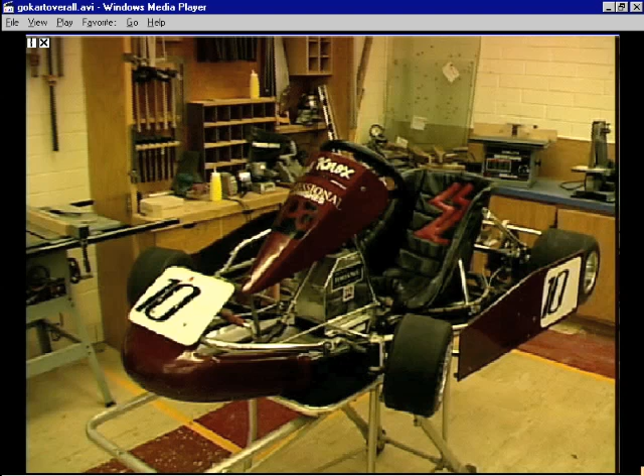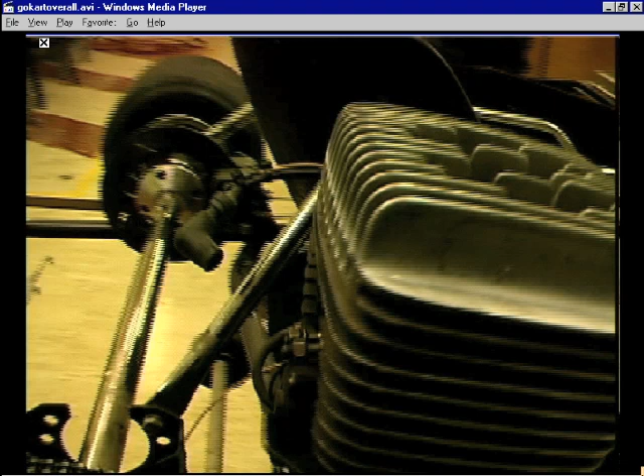We're going to show you in the next 5 minutes how we build a go-kart. Specifically, we're going to build one part completely from the start to the finish so that you can see how it's done. The part we're going to work on today is called the engine head. And that's what you see right here being taken off the engine. That's the engine head, and that's what we're going to make today.

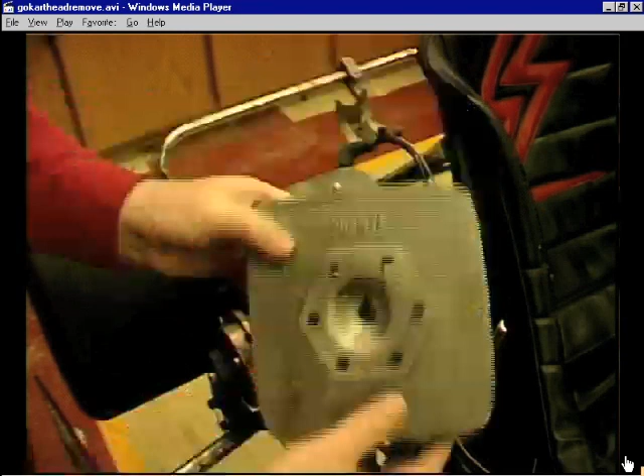We're going to use some very powerful tools to take this existing part that you see and create a model of that part inside the computer. Here you will see us take a three-dimensional digitizer, take dimensions off the existing part, and create a model of that part inside the computer.

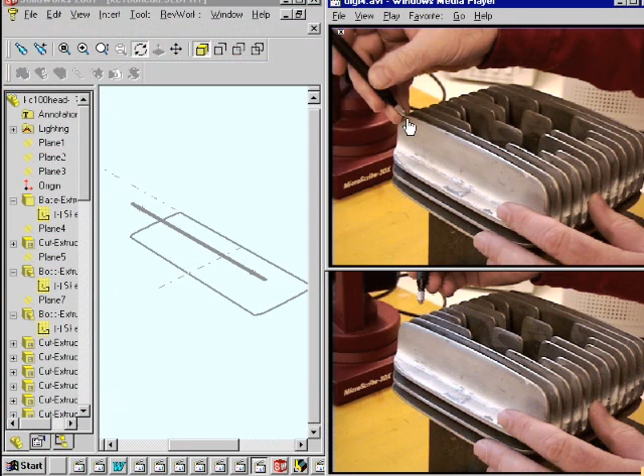This is a digital model. It's the same as the actual physical model, yet it allows us to do some very unique things with it that you'll see here in the next few minutes. We're going to take some more dimensions here, and we're going to create the rest of the head, as you will see here in just a minute. We're working on the upper fin assembly right now. You're going to see this turn into a solids model.

There it is. Now you see we have what we call the vertical fins part and the horizontal fins part. We've made the horizontal fins red and the vertical fins of our engine head in dark blue. Now we're going to put those together, and as you can see here we have a half of a head. Now the reason why we only have a half of a head is because we let the machine create the other half, which saves us a lot of time.

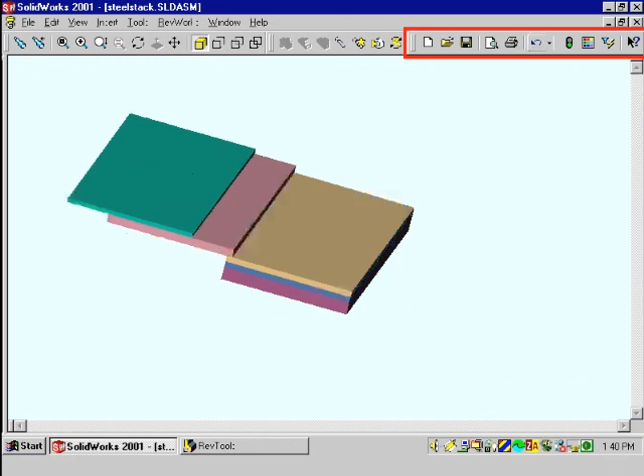Here you see a stack of what we call digital steel plates. They're not real steel plates, they're a digital model of steel plates. Now we can do a very unique thing now that we have this inside the computer. We can take and place our model of our engine head right inside of those steel plates, just like this. You can see that those plates are totally consumed

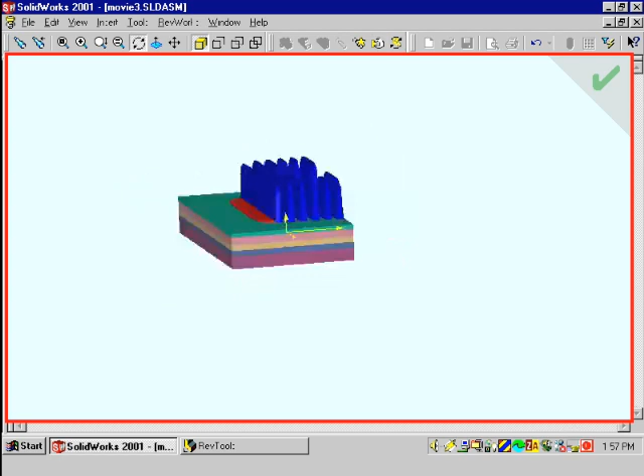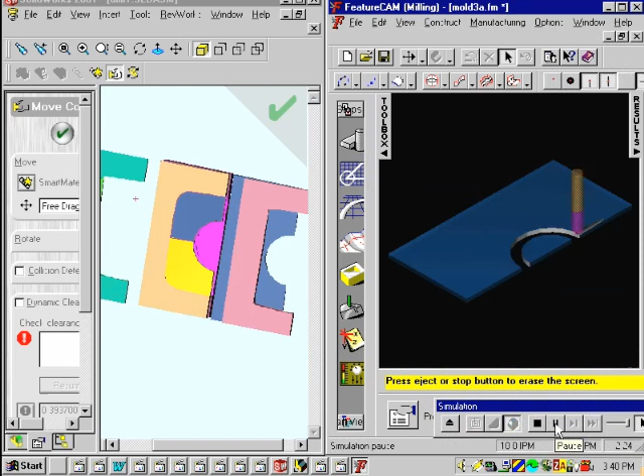by our model. Now, as we pull our model out, we have left an impression on the steel plates, as you can see here. And this is exactly what we're looking for, because we need to build a mold in order to make our engine head, and so we have just gotten the pattern for that mold by doing what you just saw.

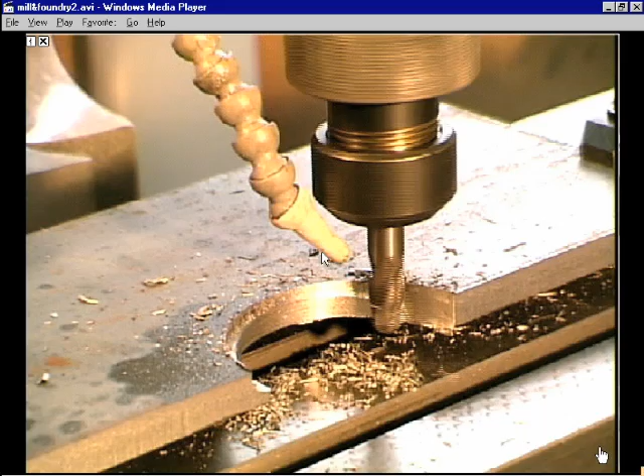Now we're going to take one of those plates, the one you see here in blue and yellow, and we're going to let the computer, using the surfaces that were created in our previous little model workup, create the information necessary to drive a computer-controlled milling machine to actually make that mold in steel. Here we are, cutting that very same part that you saw us simulate the cut of just a moment ago. Here's an end view of the milling machine.

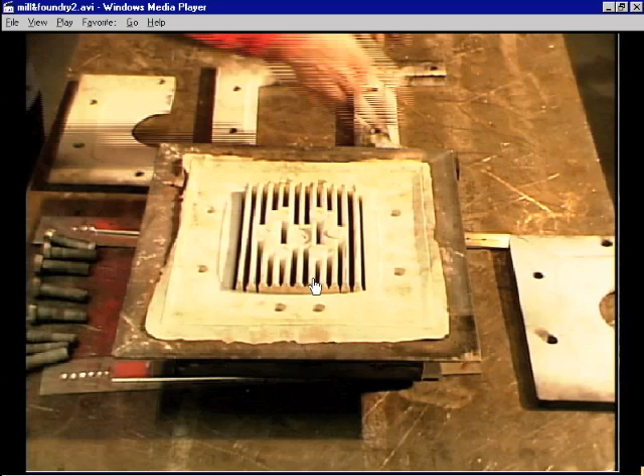The mill goes in and takes big, fast, rough cuts, and then comes in and takes fine cuts, leaving a little tiny ridge that's only 1/1000th of an inch thick, so that we can sand that ridge down and make a mirror polish. Now you can see we have our upper fin molding application in place, and these are our steel parts for our lower fin molding apparatus. The white that you see here is mold release, which allows the part that we pour into it to come free of the mold easily.

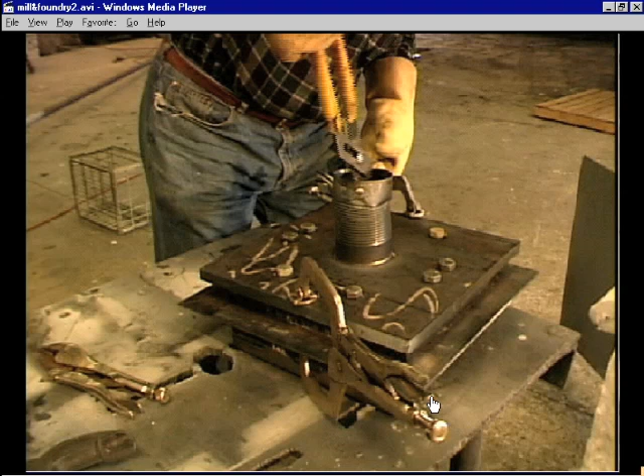Here we have our mold all assembled together, putting the bolts in so that it won't slip and slide around. We put a funnel on top. We come over and get our molten aluminum, that's liquid aluminum, and we pour it in our funnel, spill a little bit, and then we wait a few seconds, and we pull our pins off and take our mold apart and see what we've got. Looks like we have a solid engine head.

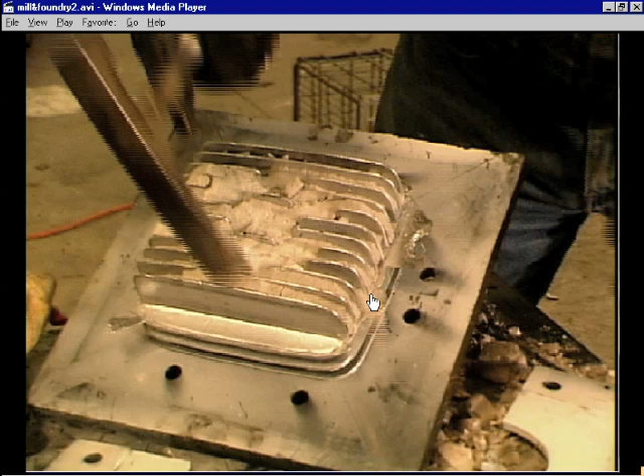Now you can see us pulling these plates off. We're just about ready to pull off that one that you saw us mill in the milling machine. Makes that deep fin in the side there. It slides right off, so our mold release did work. Now all we need to do is cut our funnel off the back side, and we'll have our part. Let's flip it over and see. There it is. Let's go through and clean it up. Now we have it all cleaned up.

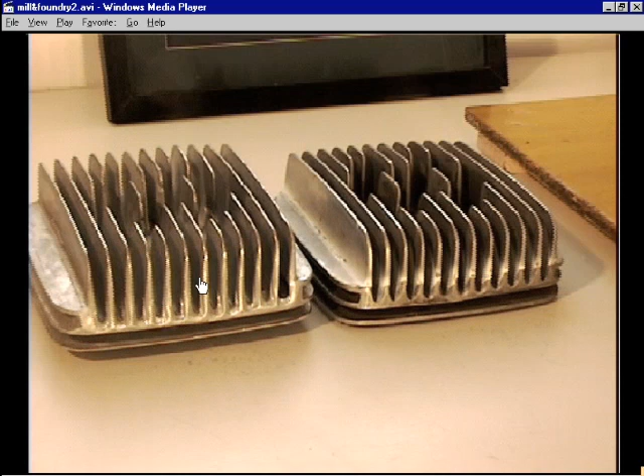You can see that it is an exact copy of the one that we took our original digital model off of. It's a little bit higher because we need to do a little bit of milling yet on this part. You'll see it right here. This is the one that we just made. This is the one that we made our mold from.

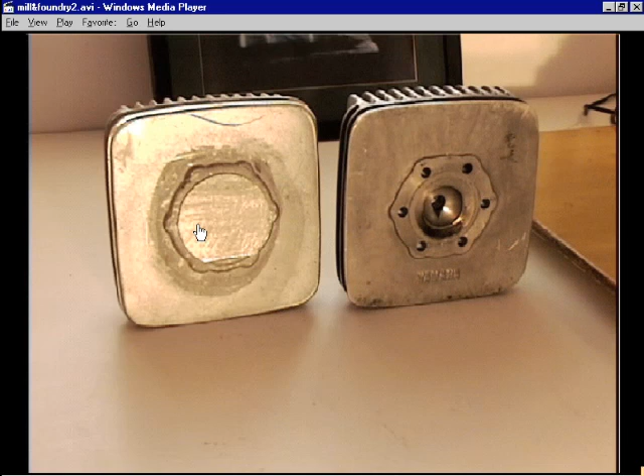All that is left to do now is just a little machining, drill the holes in, and machine the dome in there, the half dome, where the spark plug fits. So you've just seen in a quick overview how real easy it is really to create things.